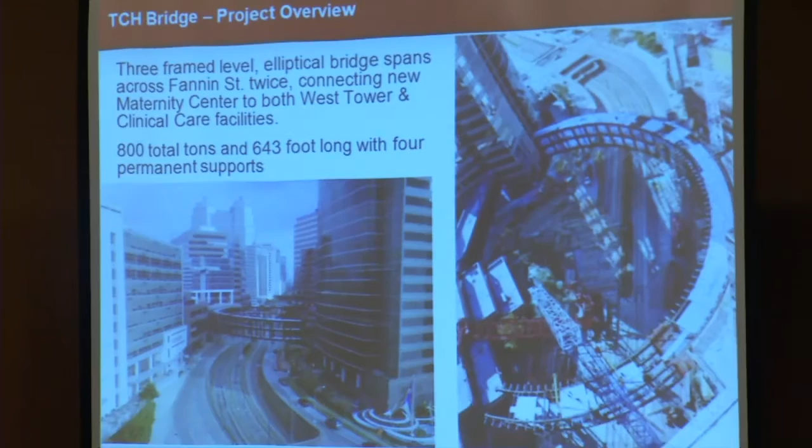As you mentioned, we won for 2010 for the Texas Children's Hospital Bridge. It was a very unique project, one we're proud to be a part of. To give you an overview, it was a three-frame level, two walking levels, a pedestrian bridge, elliptical, that spanned over Fannin Street and connected the three main Texas Children's Hospital buildings: the maternity center, the new facility across Fannin, and the West Tower and clinical care facilities. It was about 800 total tons and 643 feet long with 4 permanent supports.

The tonnage of the job and the framing itself weren't what made it difficult. It was really the site conditions more than anything. Fannin is the major thoroughfare through the Texas Medical Center. It also includes the Metro light rail running through the median, and there's an overpass visible in the right picture, so that was a major grade separation. There were basements under all 3 buildings as well as major utilities, all of which added to very difficult site conditions we had to work around, limiting where we could put cranes and lay down material.

Another thing about Fannin is it had to remain open during main hours, so all project deliveries had to be taken at night, either during the week or on a scheduled weekend shutdown, where we could work basically from 2 a.m. Saturday to 4 p.m. Sunday. So we had a very small window of complete access to the area.

As I mentioned, the 4 permanent supports meant there were several very long spans, particularly over Fannin Street, which required creative use of false work as well as large pre-assembled sections to bridge those gaps. There were very tight steel tolerances—we were connecting between 3 fixed points, so everything had to fit perfectly, or else when we got to the end it wasn't going to work. We had to pay very close attention to where we set things and the tolerances we had.

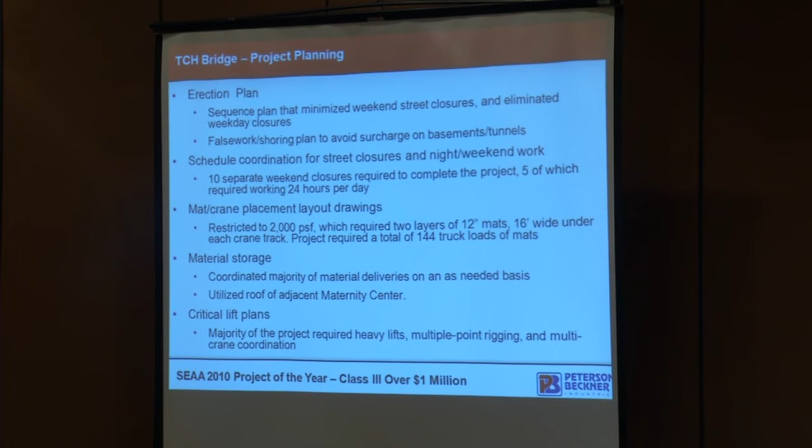The bulk of this job was actually the planning phase. It was only about a 10-week erection duration, but we spent about 3 years planning for it. We were fortunate that the general contractor recognized the difficulty of the job and brought us on board that early. A lot of times we get brought in later than we'd like and don't get as much input, but they let us on board very early, so we were intimately involved in all the planning for the entire project.

The big part was the weekend closures. They were very particular about when we could shut down Fannin Street, so we had to plan around those, and also around the Texans football weekends, since that light rail is a main transportation to and from the game—so we organized our weekend work on off football weekends. We had to plan for false work locations; we couldn't put it in Fannin Street, and also had to avoid all the basement and tunnel areas because of the surcharges they'd put on those.

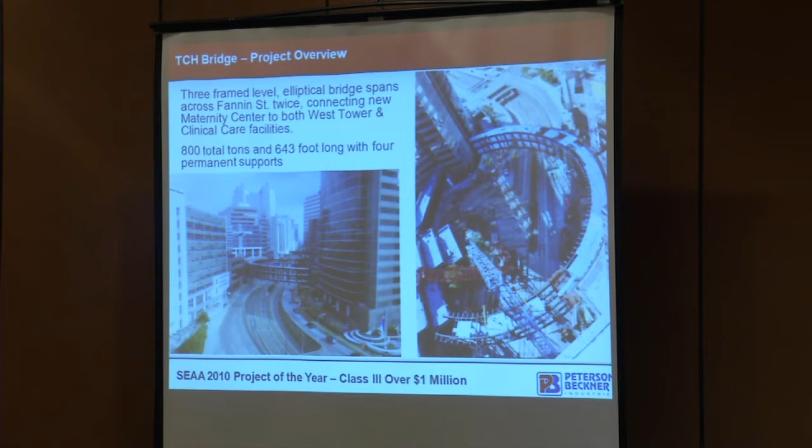As I mentioned, we had to plan the weekend closures—5 of which required working 24 hours a day, about a 36-hour period. And with all the basements and underground structures, we had to restrict our heavy cranes and equipment to 2,000 pounds per square foot, which required 2 layers of mats. To give you an idea of how many mats we needed, we had 144 truckloads. In the first picture, you can see on the right that whole mat runway for the red M250 there.

We had to have a lot of mats to try to avoid all the underground conflicts. Material storage was another problem. We could barely fit the cranes in the areas we needed, and we certainly couldn't take any extra material.

So all of the material had to be on time. And when I say on time, I don't mean you can deliver it tomorrow morning, I mean it needed to be here at 2:14. They were very, very particular about when we could take the material. On the bright side, we did have all the material in our yard, so we were kind of able to control that, which probably helped.

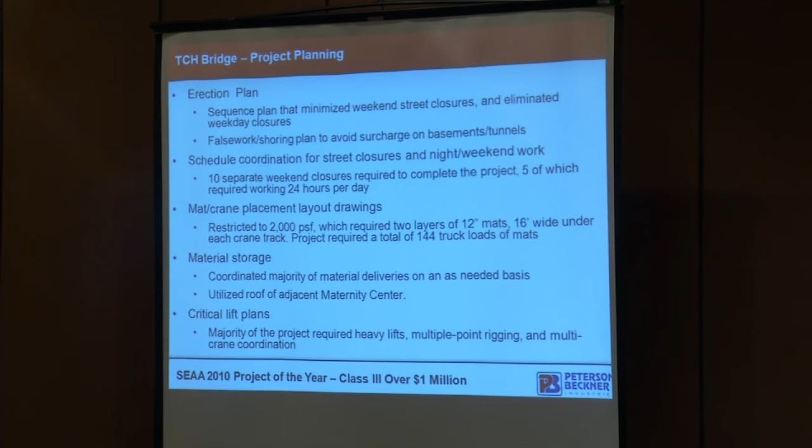Another thing we tried to do is get creative and utilize the roof of the maternity center, which was the new facility they were building. We had to come up with proper shoring and mats to spread the load, but we were able to put a couple of pre-assembled sections on top of there.

The last thing we had to do was a lot of critical lift planning. Most of these were pre-assembled, fairly heavy sections, but multiple point and multiple crane coordination, especially when you're closing the spans with two of them coming together, meant we had quite a few critical lifts involved.

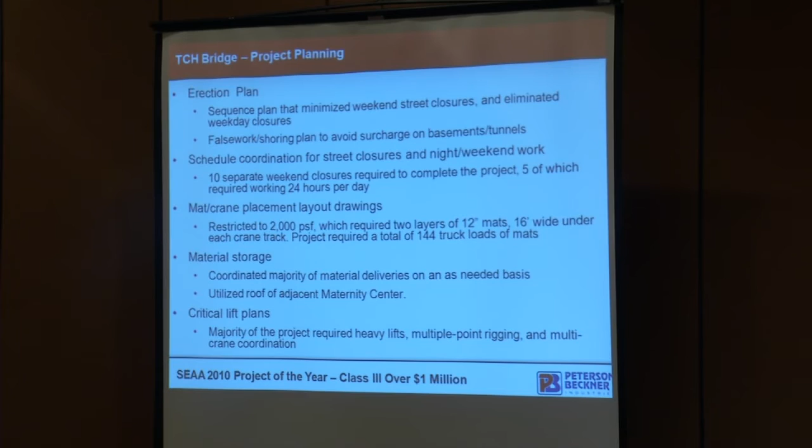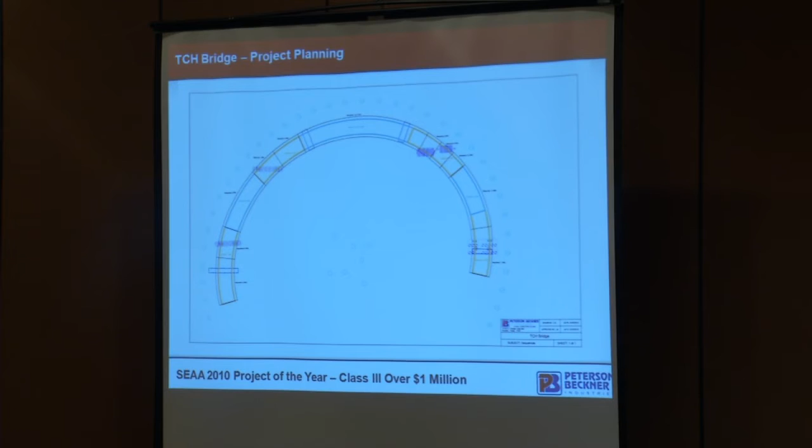To give you an idea, kind of hard to see, but the pink shows four pink false work towers, those were the locations of the towers. This was what we called the west section. We built that first, then the south span and the north span. These middle sections are the big spans over Fannin that we ended up using two cranes to fill in at the end. This gives you an idea of the site.

We used a Kobelco on the top right, a CK2500. We had to bring in a 500-ton hydro during portions on this corner. This was an M250 that, for the most part, stayed over here, and then during the critical lifts of the north span, we had to mat him over to get him over here to make this final span.

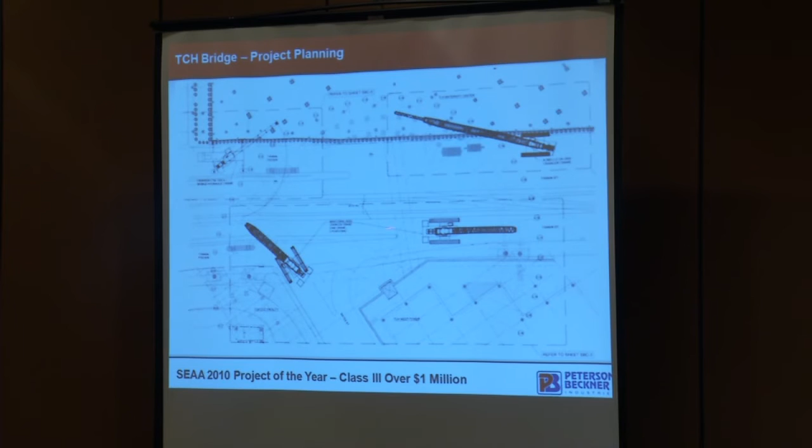This is an example of the critical lift, you can see all the mats. This is particularly one where the M250 did have to walk all the way over to set a final box section. But it involved more than just the rigging and the crane capacities, it involved all the matting required to avoid all that underground work.

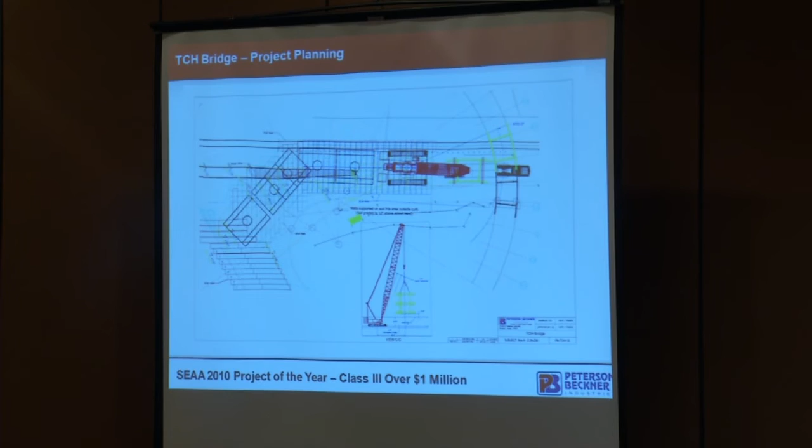The last thing I want to show you about the planning phase was this diagram we came up with for spreading the load on top of the maternity center for storing the material. Just another thing that we had to kind of deal with.

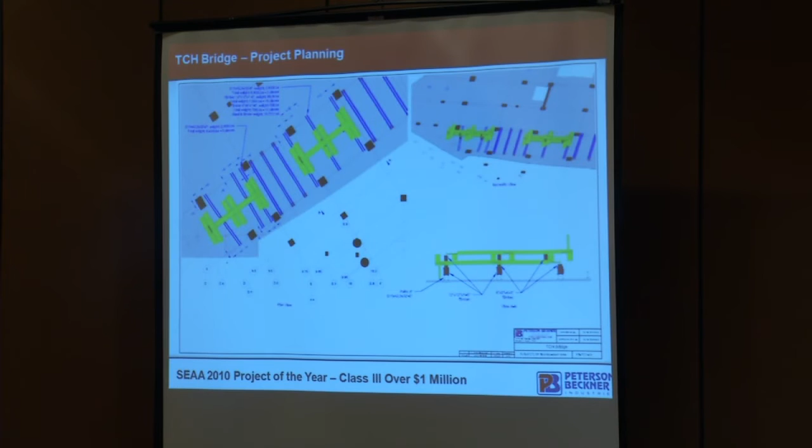So that was the planning. Now the execution, as I said, is only about a 10-week erection duration, so that part of the job was certainly not the bulk of it, but it still was no piece of cake.

The west section we stick built. We were actually able to utilize the GC furnished tower crane, the crane that was building the maternity center, and then we used our crane for the north half of it.

But the issue with the stick building was, obviously this is a bridge, so there's no anchor bolts, there wasn't any place to fix the point. You had to set it up there, shoot it in with a total station, get it exactly where you needed it, then temporarily fix it to the maternity center, tie it in, and keep it from going anywhere. Because again, the tolerances and locations of the material were very critical, so every one of those pieces had to be located and tied in before you could go to the next one.

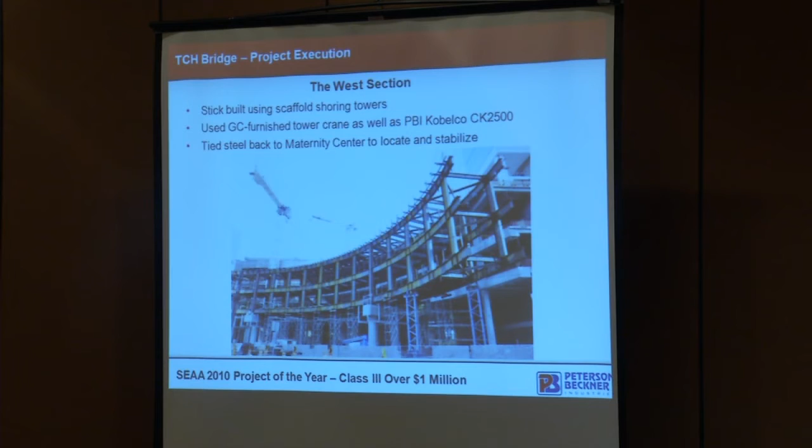After we built the west section, we went to the south span. Here we pre-assembled box sections, anywhere between 78 and 103,000 pounds. We used two false work towers right on the edges of Fannin Street where we could avoid blocking the street. That left a pretty good span in between that we had to fill in, so the last two pieces you'd fill in with one crane each and fit them in neat. Again, that's where all the tolerances really became critical on those last fill-ins, when you're completing the span it was very tight.

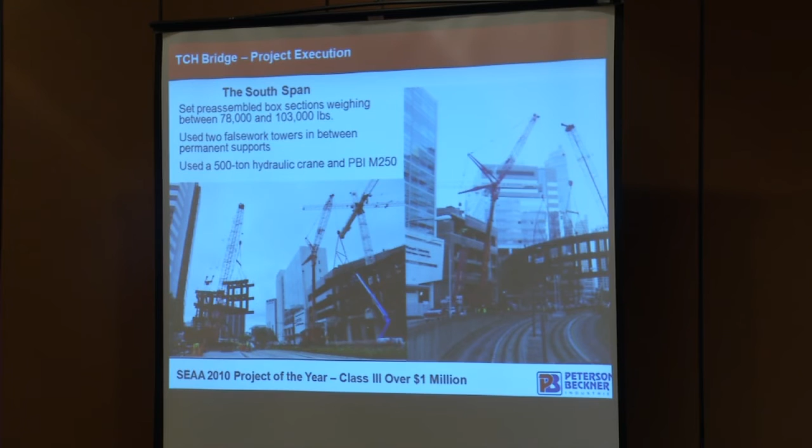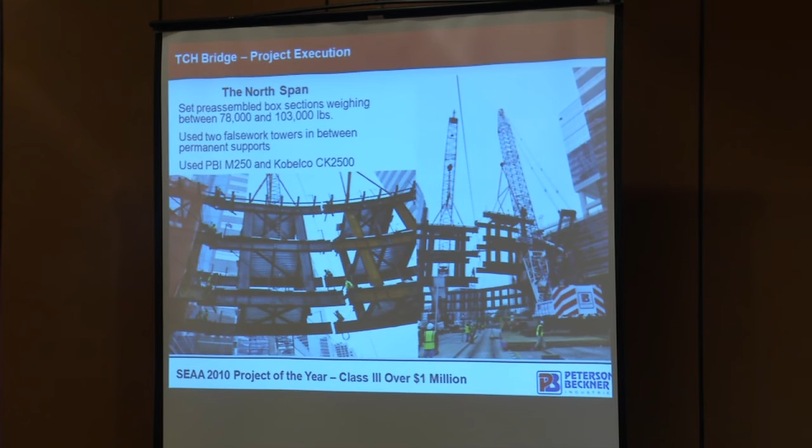Here we used our M250 as well as the 500-ton hydro crane. You can see on the right picture, that's where we're completing the span with the 2 cranes. We repeated a very similar procedure on the north. Here you can see a better example of those box sections, all 3 levels with the deck on them and the perimeter fall protection cables pre-installed to help our guys get up there and work safely. You can also see some of the netting we had to use to prevent any dropped objects onto Fannin, which was a major thoroughfare, so we had to protect the general public as well.

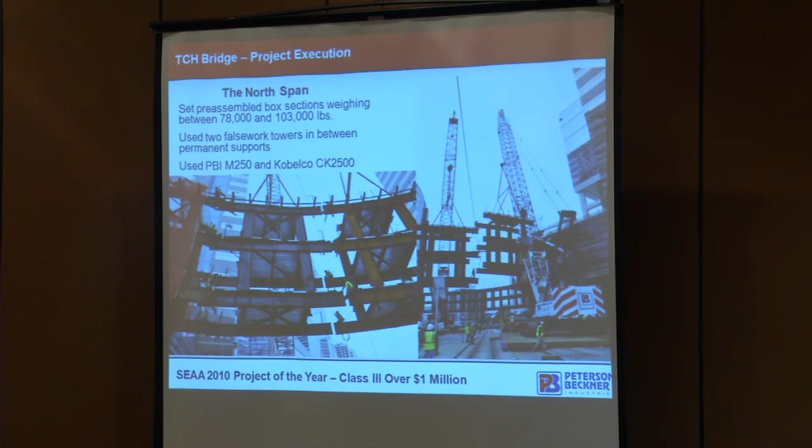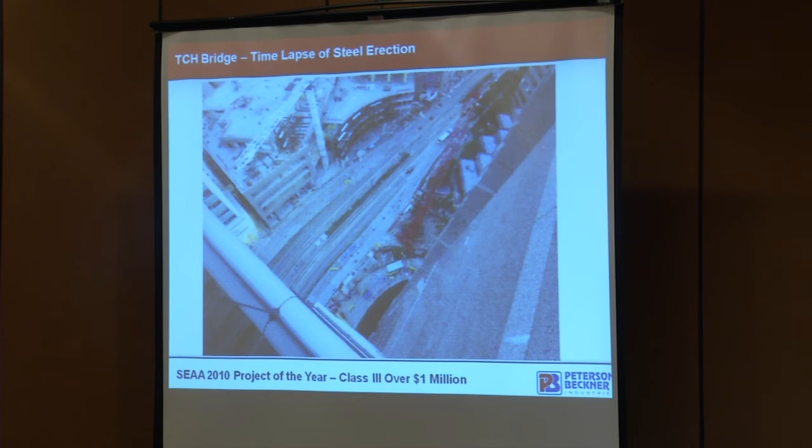This is a time lapse, to give you an idea of the progression of the job, from a 3D bird's eye view.

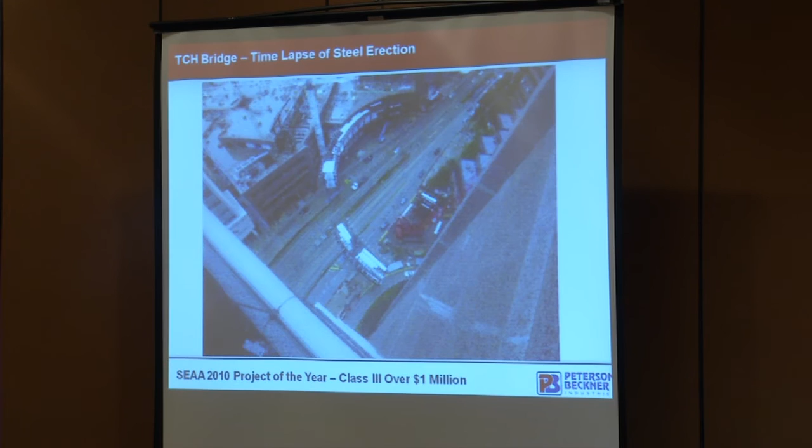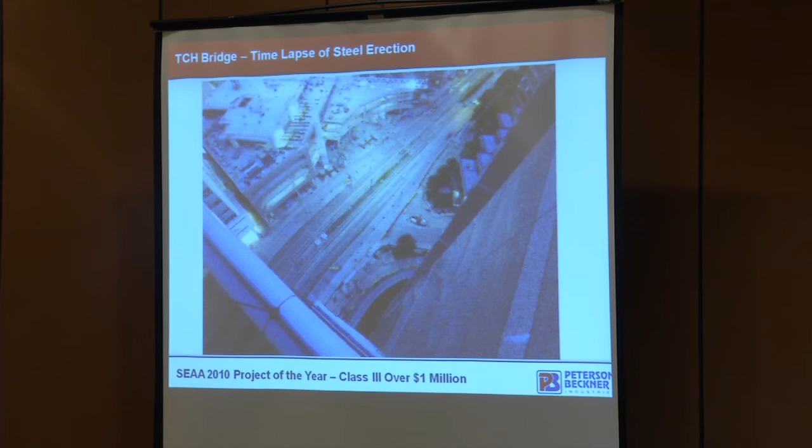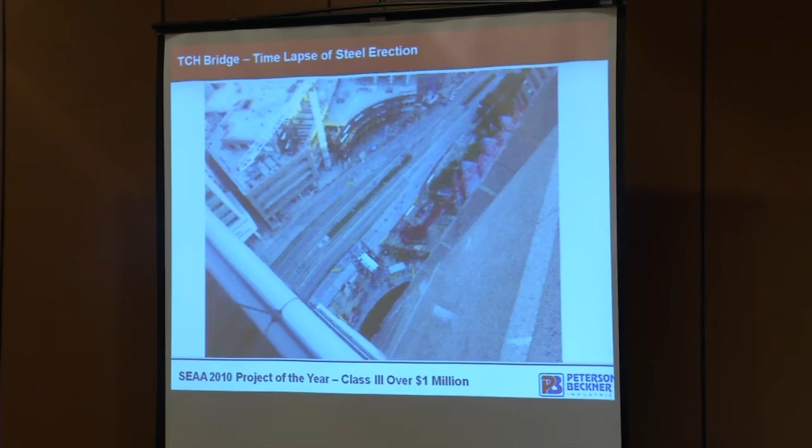You see quite a bit of night work, that was all that weekend. That was pretty much it. It was a very unique job, one we were certainly proud to be a part of, and we appreciate the project of the year. That's pretty much what I have.